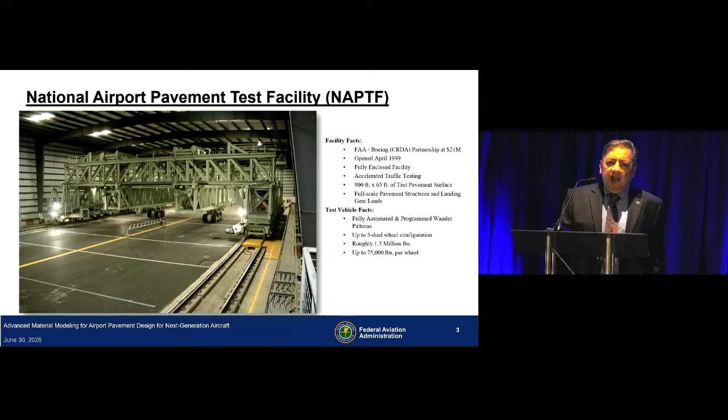In 1998, I joined Galaxy Scientific Corporation, a support contractor to the Federal Aviation Administration, and they were building a national airport pavement test facility at that time. My previous work was in low volume roads, so moving into airport pavements was very exciting for me.

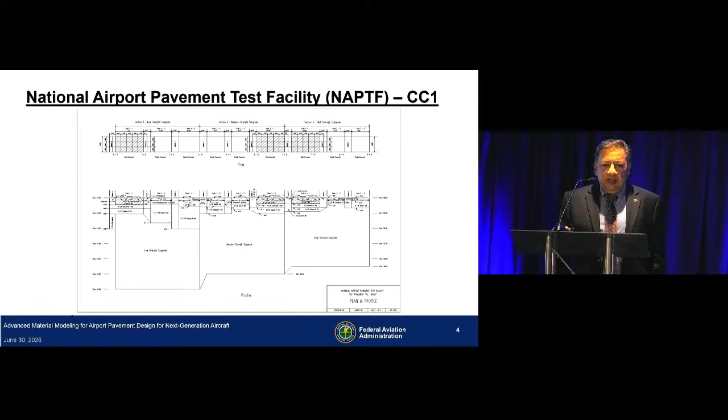This shows the layout of the facility. There were 3 different subgrade types: low strength, medium strength, and high strength. And there were 3 test sections built on each of these subgrade types: 1 concrete and 2 asphalt pavements, 1 with a stabilized base and 1 with a conventional aggregate base.

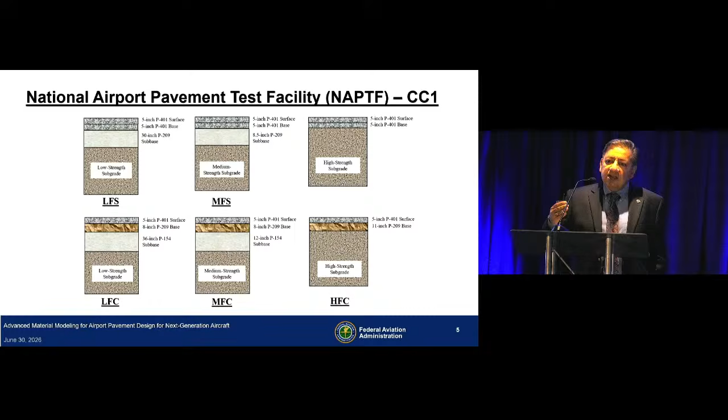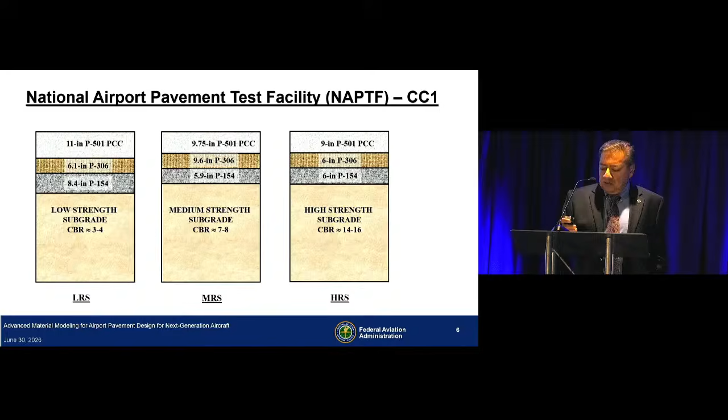This slide shows some of the cross sections. You'll see that the pavement cross section thicknesses are different. The reason is all the asphalt and concrete pavements were designed to fail in 10,000 passes of a Boeing 747 gear at a wheel load of 45,000 pounds. So the loading condition was the same for all, the subgrade conditions were different, and that resulted in different pavement thicknesses.

The test speed was 5 miles per hour, because for airport pavements the most damaging condition is when the aircraft moves from the gate towards the runway, so testing at slower speeds is more desired. The failure criteria for flexible pavements was 1 inch of upheaval outside the traffic area, signifying shear failure in the lower layers of the pavement structure, especially the subgrade.

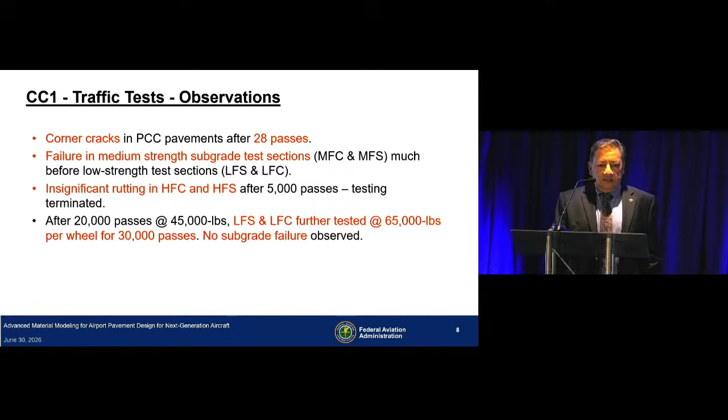So we started testing, and these pavements were designed for 10,000 passes. Concrete pavements had corner cracks in 28 passes. That was shocking. We stopped testing and had to do a lot of work on concrete pavements to figure out why that happened. Once we determined that, we continued testing on our asphalt pavements.

Now, again, they were all designed to fail at the same number of passes, but the medium strength subgrade sections failed much earlier than the low strength sections. That was very shocking for us too. And in the high-strength subgrade sections, we tested till 5,000 passes and did not see any significant amount of distress, which was rutting, so we stopped testing on those sections.

After 20,000 passes at 45,000 pound wheel load on the low-strength sections, we increased the wheel load to 65,000 pounds, a significant increase. We put additional 30,000 passes, and still those sections did not show any signs of subgrade failure.

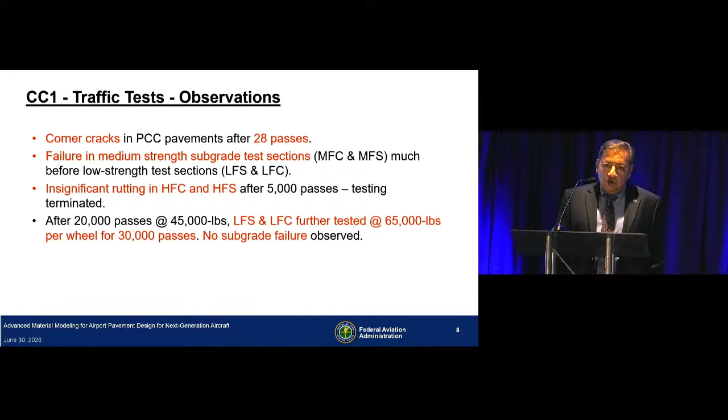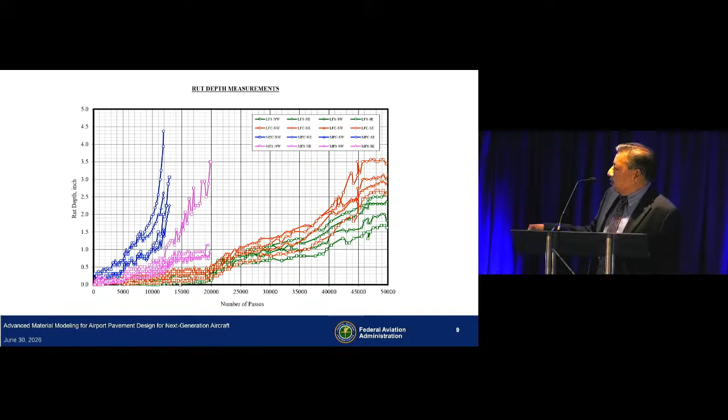On this figure, you can see the rutting results. These are the medium-strength sections that failed right around 10,000 passes. This is the medium-strength section with stabilized base, and these are the low-strength subgrade. Right here is where we increased the wheel load to 65,000 pounds.

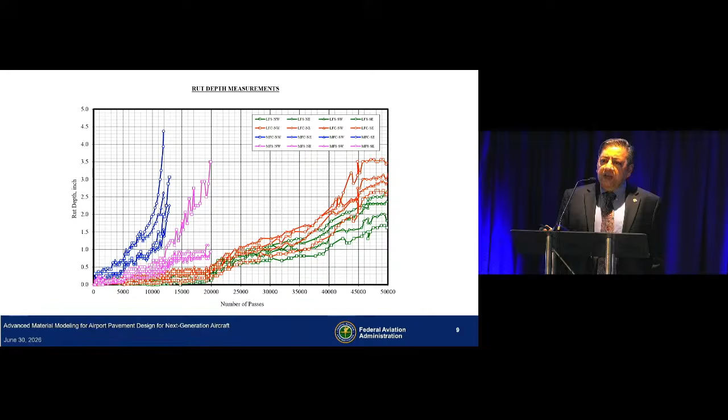So that brings up a question: what is there in our design procedure that we are not able to predict pavement life? We know predicting pavement life is difficult, but still, that's a huge difference. That prompted me to go into the history of airport pavement design, what's there, and how it evolved over time to reach where we currently are. So in the next segment of my presentation, I'll talk about the history of airport pavement design.

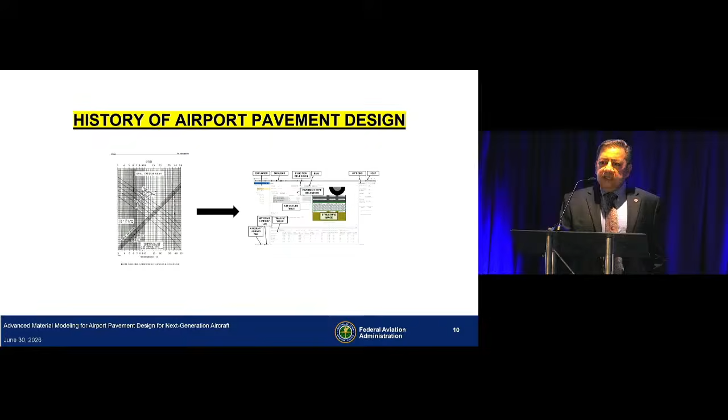Work on airport pavement started in the 1940s because of World War II, done by the US Army Corps of Engineers. In the 1940s they built some test sections. Before that, the performance curves available were for highway pavements, with design curves for up to 7,000 pounds as a function of CBR of the subgrade. So the US Army Corps of Engineers extrapolated these curves to 40,000 pound wheel loads.

But then there were these new bombers coming up, B-36 and B-29, that had wheel loads of around 100 to 200,000 pounds, a pretty significant heavy aircraft. You can see the size of the tires in this figure. So they built these test sections to extrapolate those design curves to 100 to 200,000 pounds.

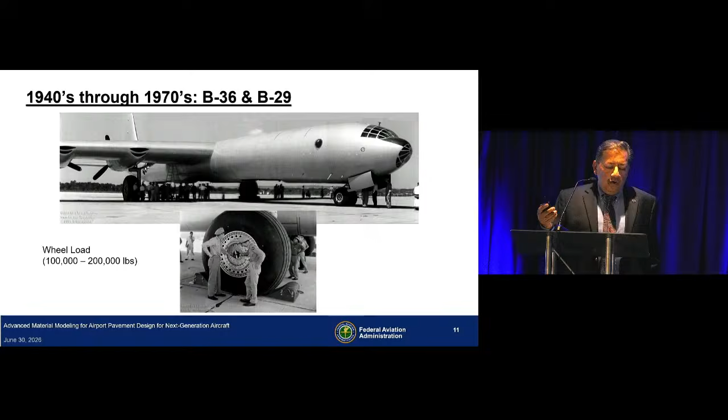It's very important to note that the person who wrote the report for the Stockton tests, Mr. O.J. Porter, made it a point in his report to say CBR is a good method now, but we should try to move away from that into other test procedures that quantify the bearing capacity of the soil and the strength of the soil. And stress ratio is something we should be looking at.

Over the years, US Army Corps of Engineers has done testing at different Air Force bases, but most of the testing has been done at Waterways Experiment Station in Vicksburg, Mississippi. Different load carts were developed over time to test for different aircraft, and you can see some of those load carts in this slide.

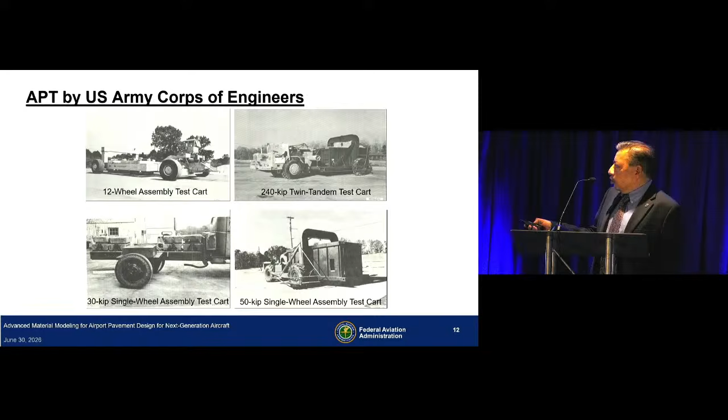From the 1940s to 1970s, all the testing was done by US Army Corps of Engineers, both over asphalt pavements, concrete pavements, and on overlays. The performance data generated from these full-scale tests formed the basis of airport pavement design procedures for both the Federal Aviation Agency, as it was known at that time, and the Tri-Services Manual.

One of the major test series carried out was also known as the multiple wheel heavy gear load study. It was the arrival of the Boeing 747 aircraft, with its four-wheel gears, that necessitated the need for this study. All the information from these studies was implemented in the form of nomographs.

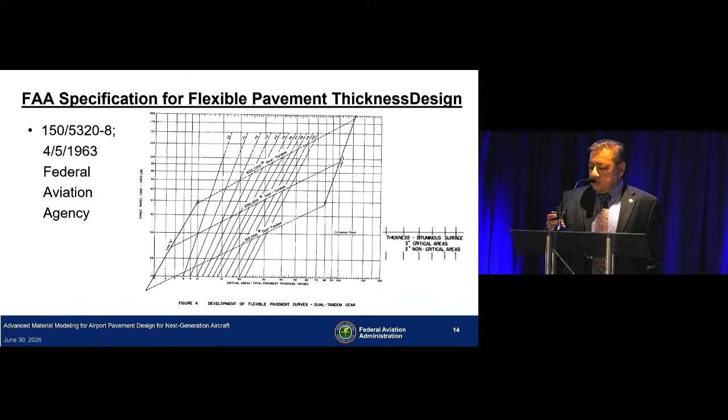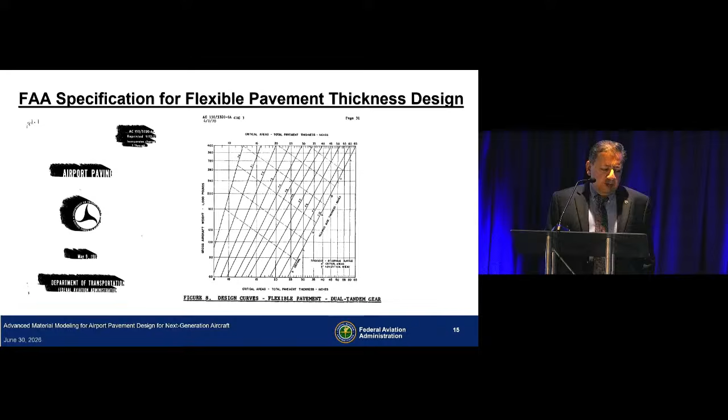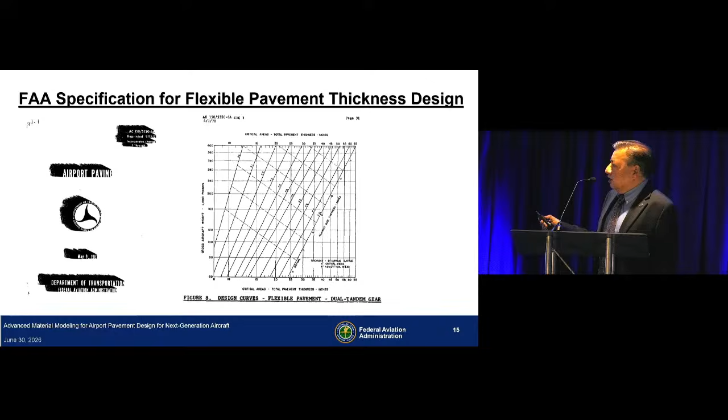As more data was accumulated, the charts were modified and new charts added for new aircraft as they came out. This particular advisory circular was issued on May 9th, 1967. Again, you have these nomographs for different landing gears and different aircraft, but still there is no consideration of aircraft operations.

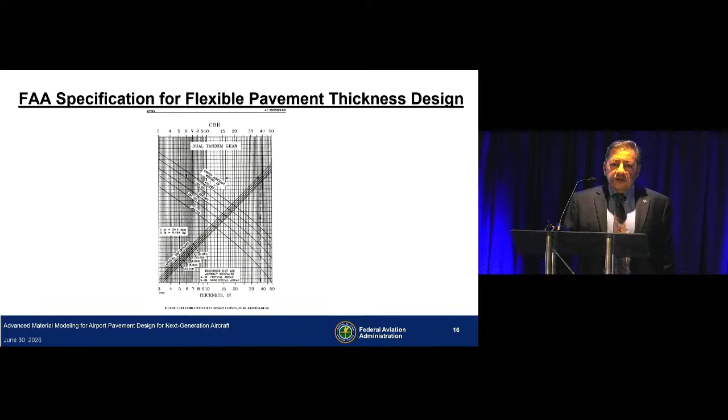In 1995 was issued Advisory Circular 5320-6D. This advisory circular's nomographs included CBR of the subgrade and aircraft operations, and the design procedure required you to convert departures of each aircraft into departures of a design aircraft. Once you have the departures and your design aircraft determined, you would go to the nomograph for that particular aircraft and come up with pavement thickness.

Then in the early 90s, there were two aircraft on the design boards, the Boeing 777 and the Airbus, at that time called the A3XX, which later became the A380. Now you're looking at wheel loads of over 60,000 pounds.

The ICAO methodology used at that time by different member states to look at aircraft-airport compatibility was called ACN-PCN, or Aircraft Classification Number and Pavement Classification Number. The way ACN-PCN methodology works is, if your ACN is less than or equal to PCN, you can have unlimited operations of that aircraft on that pavement. ACNs are the responsibility of the aircraft manufacturer, while PCNs have to be computed by the airport owners.

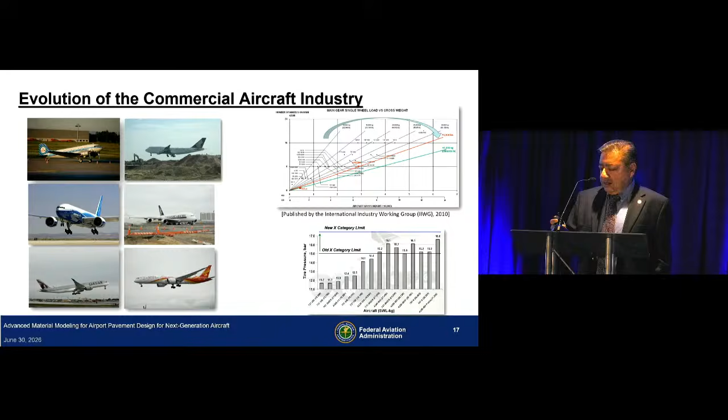So while testing was going on, researchers at FAA thought that with the 6-wheel landing gear, it was very important to consider wheel load interaction that takes place at lower depths in the pavement structure—in the base, subbase, and subgrade level. That's something that cannot be done using the CBR equation that was the basis of previous design procedures. That led to the development of LEDFAA, which stands for Layered Elastic Design for Federal Aviation Administration.

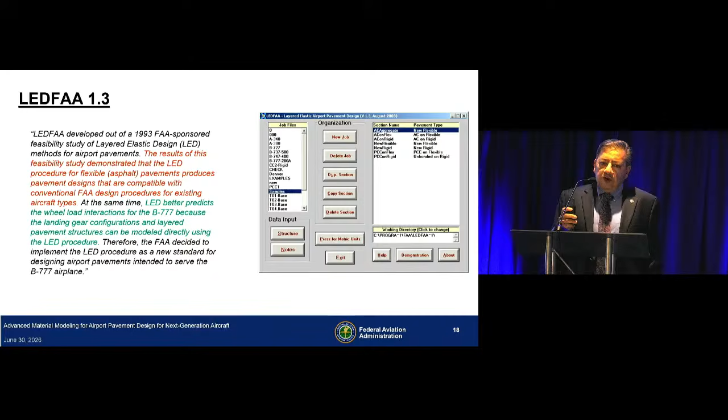They looked at pavement thickness designs using LEDFAA for the existing aircraft, and they were compatible with what thicknesses you would get from the nomographs. So FAA made a policy that if any aircraft traffic mix has a six-wheel landing gear aircraft, which was the Boeing 777 at that time, designers were supposed to use LEDFAA for pavement thickness design. If your aircraft traffic mix did not have the 777, you could use the old nomographs.

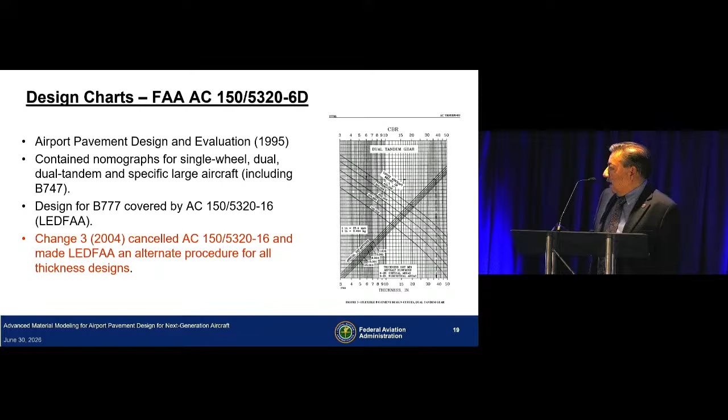When we started using LEDFAA and were refining our failure models based on the full-scale test data we were generating at NAPTF, we found that LEDFAA should be fine for any kind of traffic mix. So in 2004, FAA issued Change 3, which cancelled Advisory Circular 5320-16—this was the advisory circular that required use of LEDFAA. LEDFAA was made an alternate procedure for all thickness designs, whether your aircraft traffic mix has the Boeing 777 or not.

You characterize your materials—what materials are you using for construction of your airport pavement? Climate—how is it going to affect your pavement performance? And traffic. Remember, in the previous design procedures, we were looking at a design aircraft—that was the traffic model for those design procedures—but we had new ideas for the mechanistic empirical design procedure.

So all these inputs are then fed into a structural model. In LEDFAA, it was a layered elastic analysis. The structural model would predict critical pavement responses such as stresses, strains, and deflections, which are then related to pavement performance through the use of transfer functions.

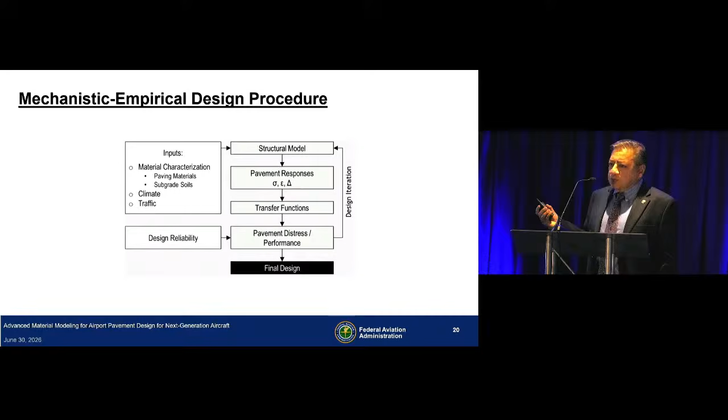This part here, the transfer functions, is the empirical part, because this is based on observations under full-scale tests or at actual airports. That's probably one of the reasons why it'll be very difficult to have an entirely mechanistic design procedure.

So while LEDFAA was being used, we were also working on developing a finite element-based design procedure, and that was FAARFIELD. FAARFIELD 1.3 was released in 2009, and the advisory circular issued by FAA at that time was 5320-6E, which required you to use FAARFIELD.

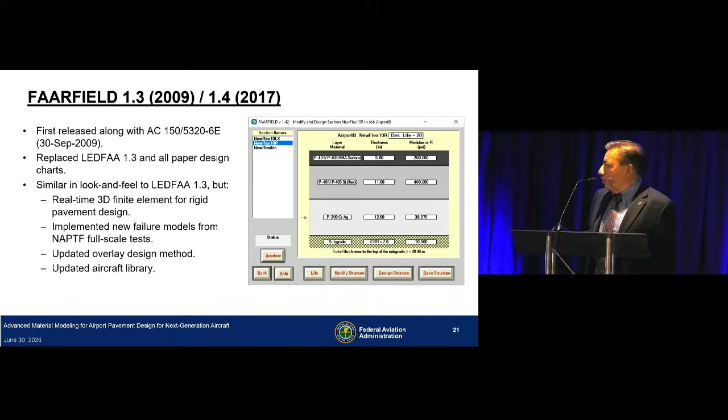It replaced all the nomographs and LEDFAA. Now, if you look at the user interface, if a person had used LEDFAA, using FAARFIELD was exactly the same, because all the improvements and advancements were in the background. FAARFIELD had layered elastic analysis for flexible pavement design and used 3D finite element for concrete pavement design.

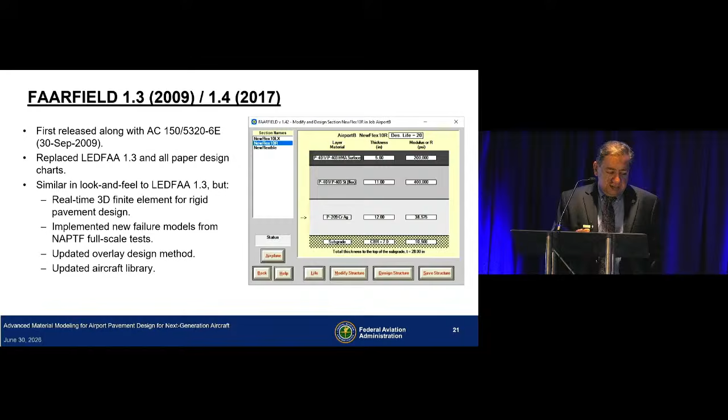When you look at the structural response models, for rigid pavements we were using the Westergaard solution for the nomographs. For flexible pavements, we used equivalent single wheel load that was computed using the Boussinesq model, whereas in FAARFIELD we used layered elastic analysis for flexible pavements and 3D finite element for rigid pavements.

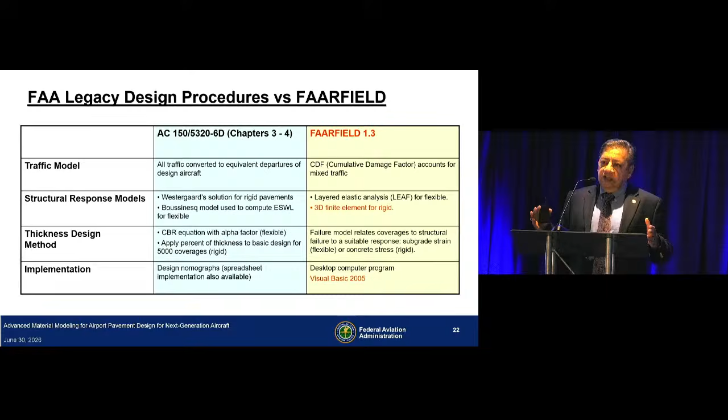For the thickness design method for flexible pavements, it was the CBR equation in the nomographs, and in FAARFIELD we used failure models developed based on full-scale test data—we looked at the entire history of full-scale testing from the 1940s till mid-2000 to develop those failure models. Implementation of the old method was in the form of nomographs, whereas with FAARFIELD it's in the form of a computer program.

The latest version of FAARFIELD that you can use currently is FAARFIELD 2.0. Here is a screenshot of FAARFIELD 2.0—it has a much more modern look to it. The failure models are still the same compared to FAARFIELD.

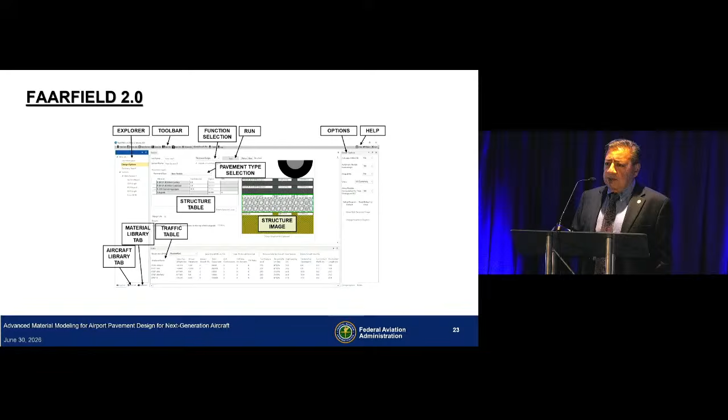For flexible pavement design, the two predictors of pavement life are the horizontal strain at the bottom of asphalt layer, which relates to fatigue failure in the asphalt material, and maximum vertical strain on top of the subgrade, which relates to rutting in the subgrade that ultimately causes shear failure.

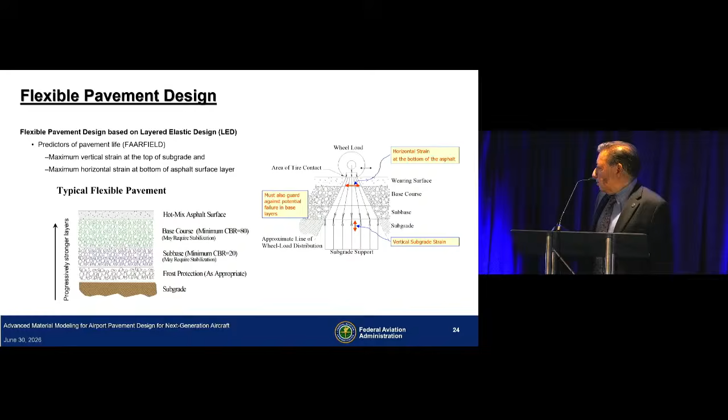So how do we account for traffic in the new design procedure FAARFIELD, or what we currently have, the state of the art?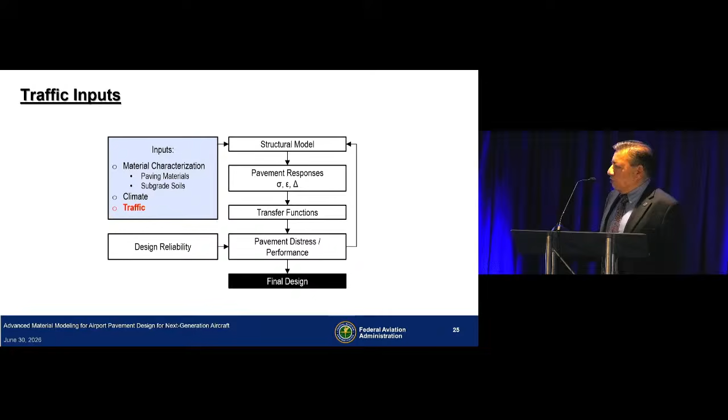We look at the cumulative damage factor, which is the summation of damage caused by individual aircraft, then sum it up. When your CDF value reaches 1, that means you have utilized the entire life of that pavement structure. So in FAARFIELD, the gear location and wander are considered separately for each aircraft in the traffic mix.

Pilots try to put the nose wheel gear on the center line of the runway, but you still see some wander, and that wander depends on what type of aircraft you're in. So that's considered, and the CDF is calculated for each 10-inch wide strip over a total 20.8 meter width.

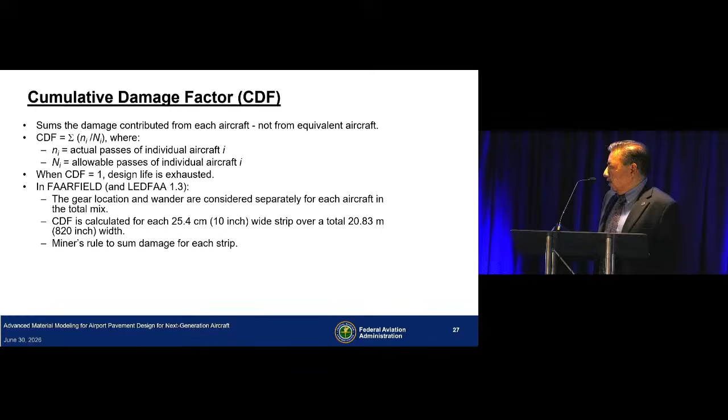We look at where the critical location is, and the CDF coming from each aircraft at that location is summed up to design your pavement. We use Miner's hypothesis to sum up the damage.

This figure explains that part. We are showing two different aircraft, airplane A and airplane B. The difference between their peak responses is because of difference in the gear location.

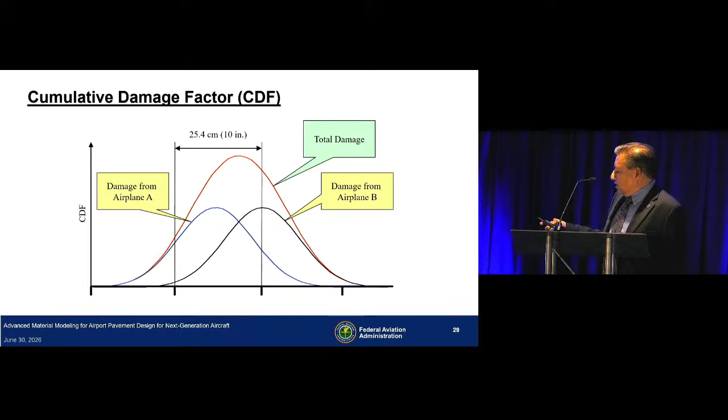When you sum up the damage from each aircraft at each location, what you get is the red curve, which is the total damage caused by these two aircraft. And that is what is used in the thickness design.

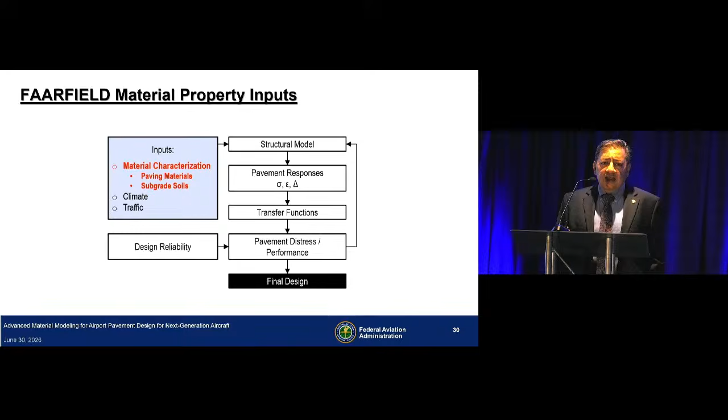For climate, the design procedure does not consider climate explicitly, but we have Advisory Circular 5370-10H that provides material and construction specifications, giving guidance on how to select different binder grades depending on which temperature region you are in the country.

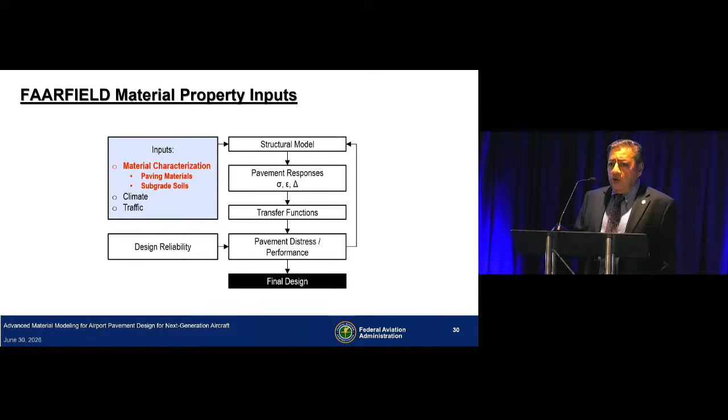Next, I'm going to talk about material characterization, how it is done today. This chart summarizes the material properties that are used in airport pavement design procedure FAARFIELD.

For aggregate and subbase, the modulus is computed by a routine embedded in FAARFIELD that looks at internal sublayering and then assigns modulus values, with modulus increasing from bottom to top, which accounts for confinement, since confinement reduces as you go down in the pavement structure.

For subgrade soils, users can input elastic modulus, but most of the time CBR is the value that is available, and CBR is converted into modulus by multiplying it by 1500.

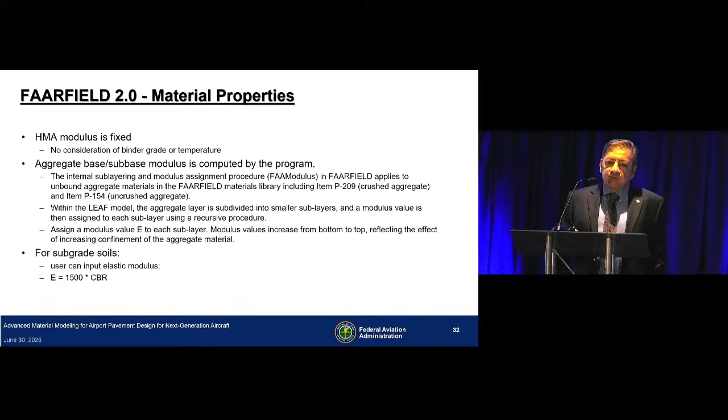That also raises some issues, because if you look at the relationship between modulus and CBR in literature, there is a wide variation in those modulus values. So which relationship do you really use? The one FAA uses comes from the Shell design procedure, 1500 times CBR.

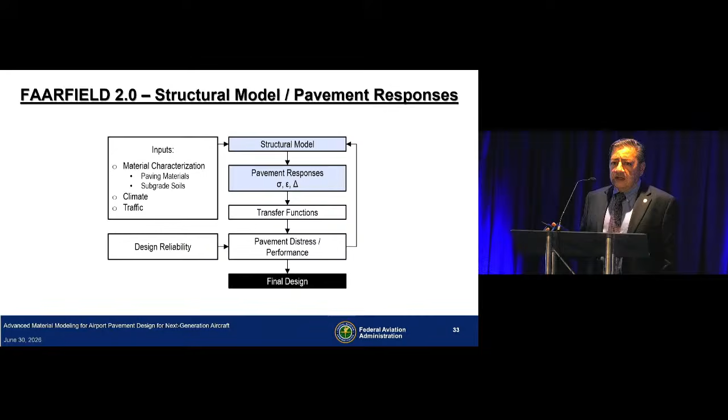For the structural model, as we already discussed, it's layered elastic analysis for flexible and 3D finite element for rigid pavements. The pavement responses we look at are strains in the asphalt concrete and vertical strains on top of the subgrade.

The number of cycles to failure in fatigue is a function of the plateau value, and the plateau value is a function of strain in the asphalt, the flexural stiffness, the void parameter, and gradation parameter. This model was developed based on 4-point bending beam fatigue tests.

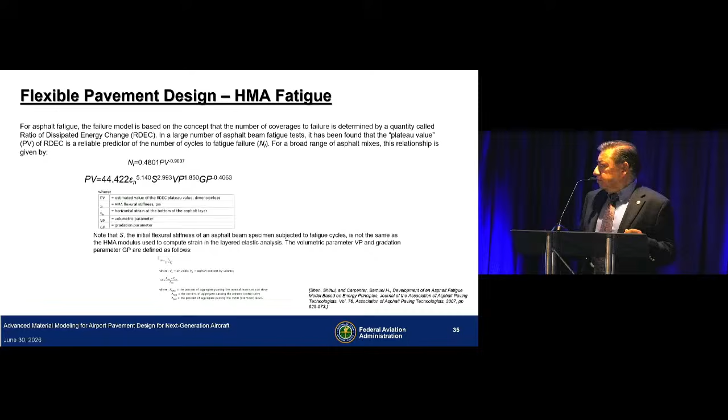This design procedure measures the flexural stiffness of the beam for the first 100 repetitions, and failure is considered when the stiffness reaches 50% of the initial value, signifying formation of microcracks in the asphalt beam. The volumetric parameter and gradation parameter come from your mix components, so if you know your asphalt mix, you can compute the gradation and volumetric parameters and determine your number of cycles to failure.

We did tests in construction cycle 7 to validate and refine the model, and found that the number of cycles to cause alligator cracking—since in the field, fatigue is defined by the occurrence of alligator cracking—takes about 3 times the number of cycles predicted by this model. This makes sense because failure in the model is reduction in stiffness to 50%, which represents microcracks, whereas alligator cracking involves almost full-depth cracks in the asphalt layer.

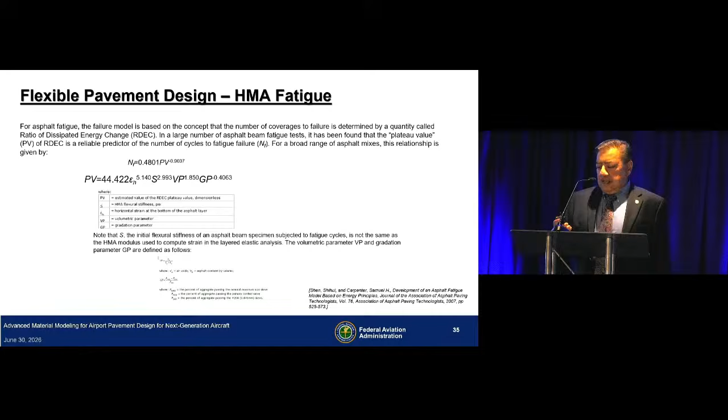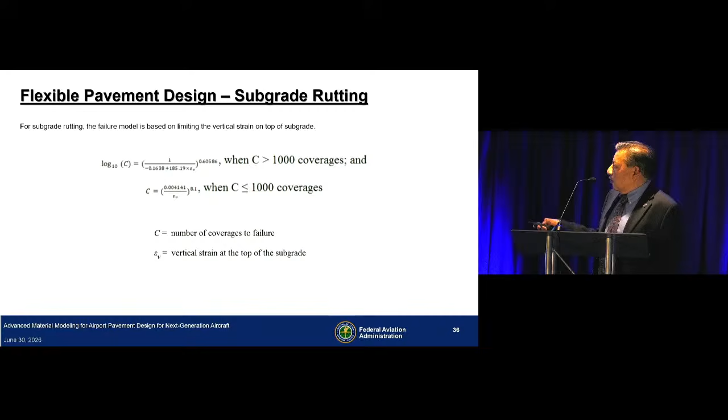For subgrade, it's a kind of bilinear model. We have one equation when the coverages are less than or equal to 1,000, and another equation when coverages are greater than 1,000.

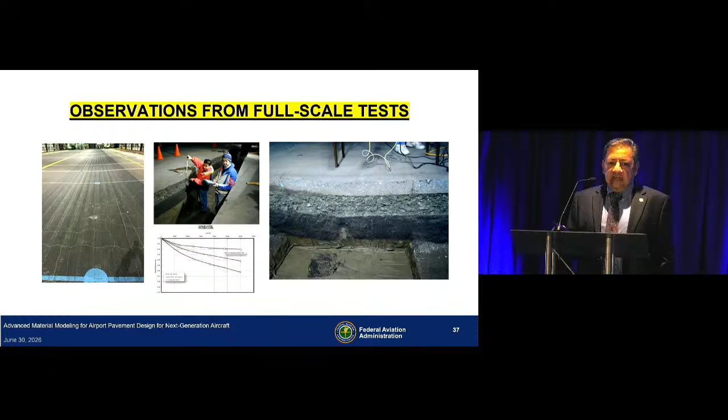So that's the current state of the art of our pavement design procedure: the responses we use for predicting pavement life, and the material input properties. But what was the reason for such a big difference in pavement life that was observed, even though the sections were designed to fail in 10,000 passes? The next section will cover what we observed in the full-scale tests from 2000 till now, which may help explain the difference between predicted life and actual life.

We'll start from the top layer of the pavement, the asphalt material. If you remember, in design, asphalt modulus is fixed with no consideration given to binder grade or temperature effects. This was research done at the National Airport Pavement and Materials Research Center, where we have the ability to control pavement temperature and test sections under controlled temperatures.

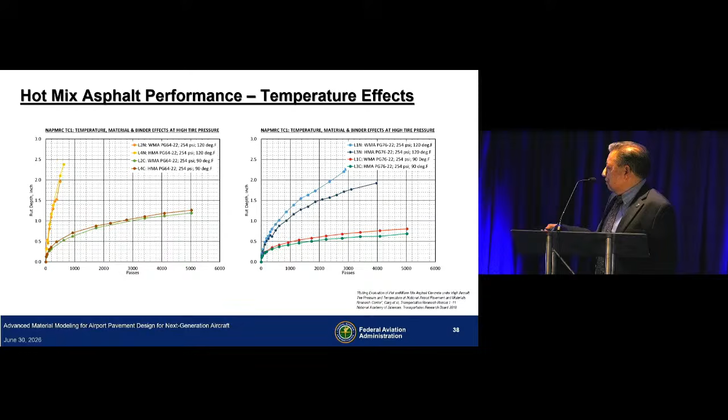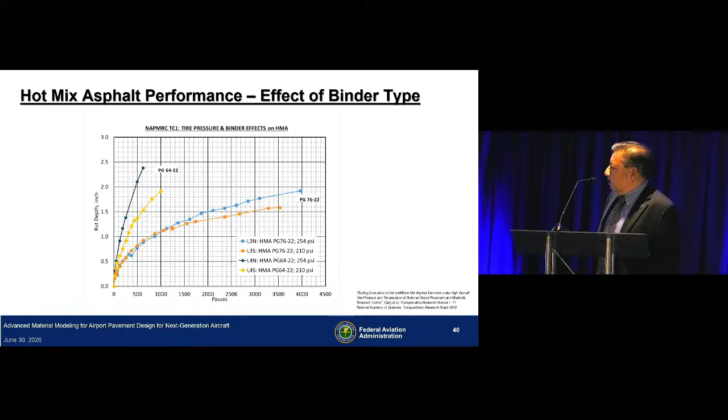Cracking, fatigue cracking. Now, one of the advantages of full-scale testing, accelerated pavement testing, is you can see the evolution of distress in these pavement structures. And when you look at cracking,

So you do not have any significant amount of unrecovered or permanent strain. When you look at the transverse strain gauges, that's where you start seeing some strain accumulation, for both single axle and 3 axles. As each of these axles approaches, you start seeing accumulation of strains. And it is this accumulation of transverse strain that results in the longitudinal crack in your pavement structure.

So the first crack that you generally see is a longitudinal crack, and these cracks form right around tire edges. Why they form right around tire edges is something that will come later in my presentation, where I'm going to use some of the work from Professor Al-Qadi's research. Once these longitudinal cracks extend, they kind of become like asphalt beams, and then they start developing transverse cracks, and that's what results in your alligator cracking.

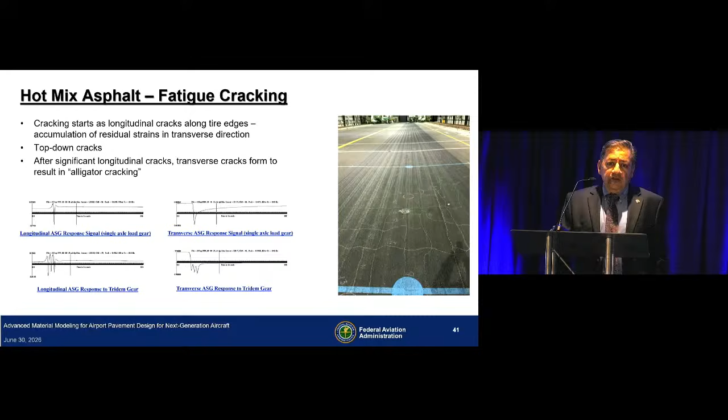Whenever a crack is formed, you want to know whether it's surface initiated or coming from the bottom, because most design procedures assume bottom-up cracking in the asphalt. In my 28 years at this facility, I have never seen a bottom-up crack. All the cracks have been top-down. I remember a presentation given by Professor André Molenaar from Delft University at one of the ISAP conferences, titled Bottom-Up Cracking, a Myth. I'm one of those people who has never seen it. We've even built thinner sections with 3-inch thick asphalt pavements, and still it's been top-down.

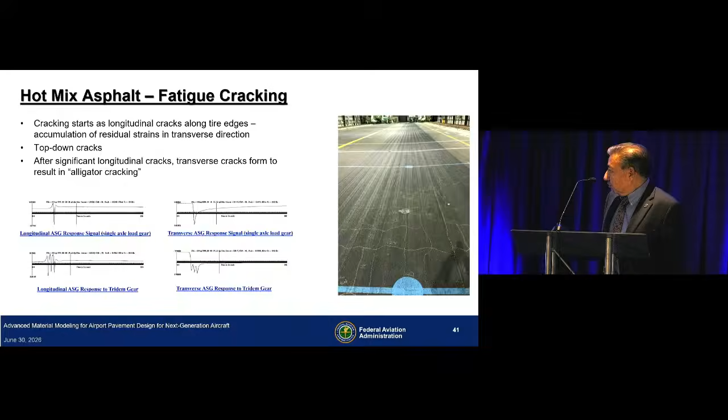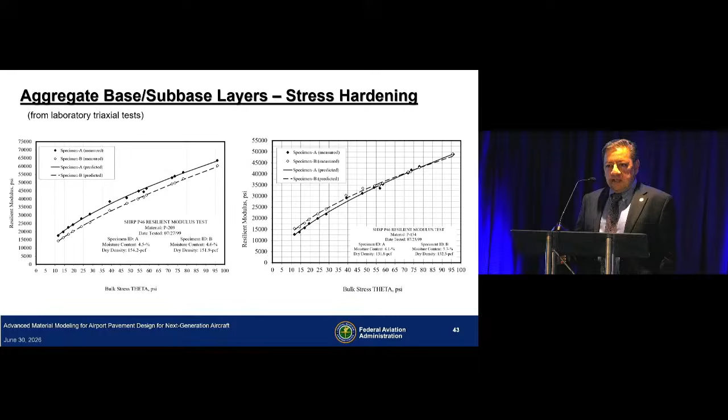On the right side is the chart for our sub-base material, P154. In our studies, we used crushed screenings, so it's a crushed material, and it also shows stress hardening behavior. Whereas, if you remember in our design procedure, we use an equation to compute the modulus of the aggregate layer as a function of subgrade CBR and layer thickness, without giving any advantage to the quality of the material we are using.

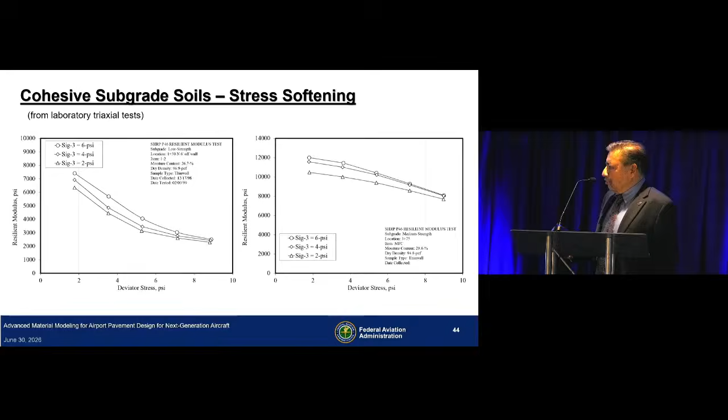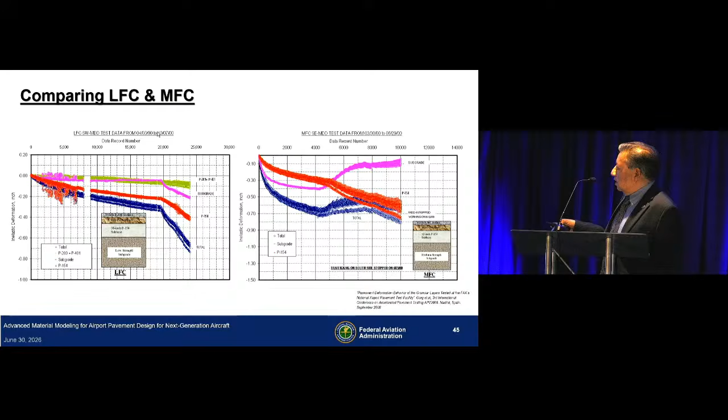It's a very different behavior in your medium strength subgrade test section. Your deformation in the subgrade is much higher compared to your base or subbase layer. This is your subbase layer, and something happens around 5,000 passes—as you can see, we see the change in the curve.

Why these curves turn upwards is that the MDD was not located at the location of maximum rutting. It was not in the center, it was on the side. So this material flow was pushing the tube of the MDD, and we saw that in the trenches.

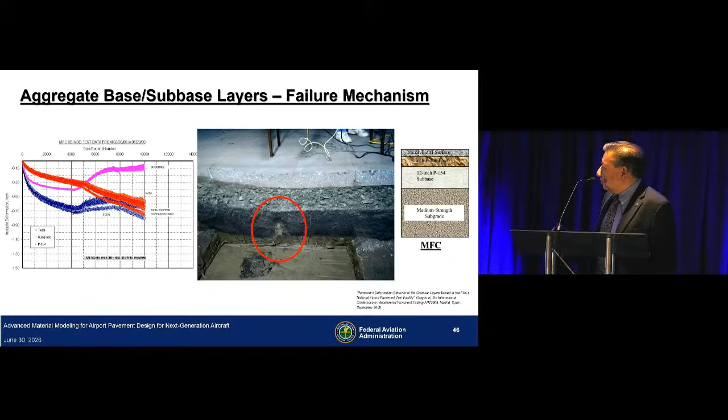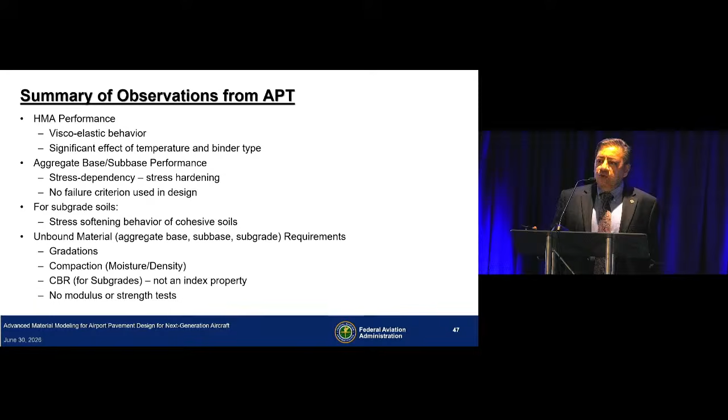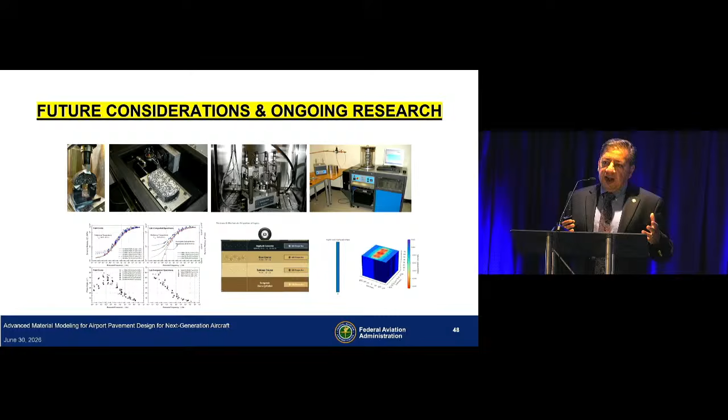So we saw how pavements behaved, and we saw our design procedure. So where do we go from here so that we can bridge the gap between the predicted life and the actual life of the pavement structure? That's something I'm going to talk about in this part of my presentation.

You can do advanced material characterization. There are a lot of lab tests available that characterize the viscoelastic, viscoplastic behavior of asphalt materials, the stress-dependent behavior of aggregate layers, and stress-softening behavior of subgrade soils. But you also need a pavement analysis tool that can use these input properties, and that's something we are currently doing.

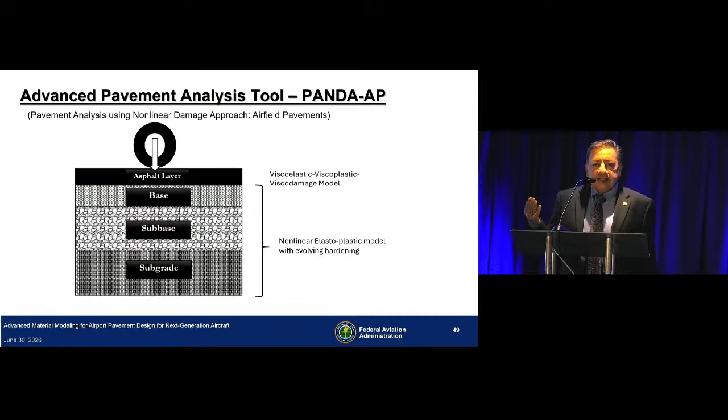We are working on developing this program called PANDA AP, which is pavement analysis using nonlinear damage approach for airfield pavements, where the asphalt layer is modeled as viscoelastic, viscoplastic, and the aggregate materials and subgrade are modeled as nonlinear elastoplastic materials with evolving hardening.

For asphalt materials, we use a combination of Schapery's model to look at nonlinear viscoelastic behavior, and a Perzyna-type viscoplastic model to look at hardening and relaxation to account for permanent deformation in the asphalt material.

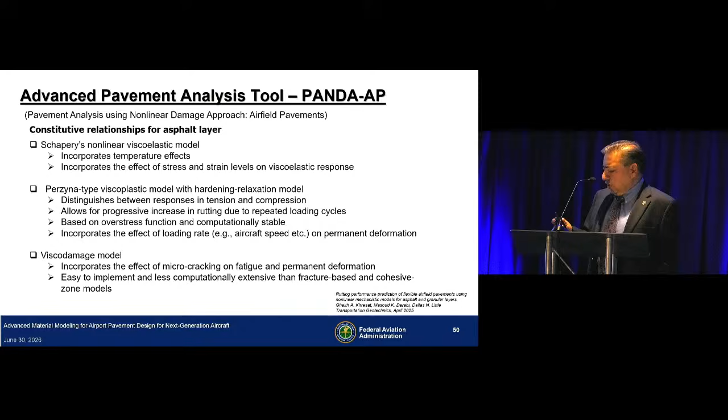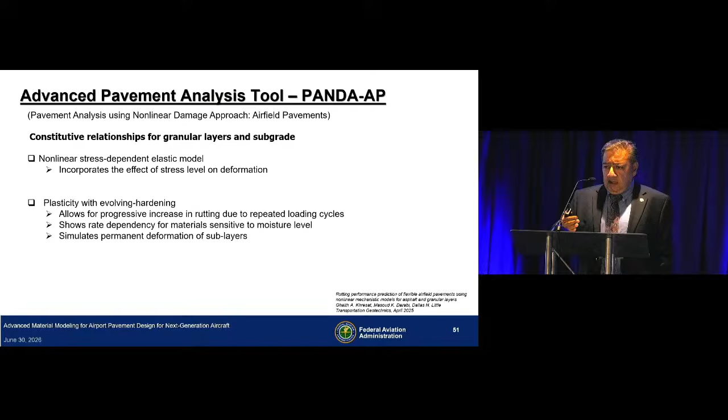Currently, this program is going through critical evaluation, and we have around 20 subject matter experts in the US and abroad working with the program to provide us comments. Because one of the things we also want is that the program should be easy to use, because if it's not easy to use, people are not going to use it. So we are looking at the usability and the science behind the models.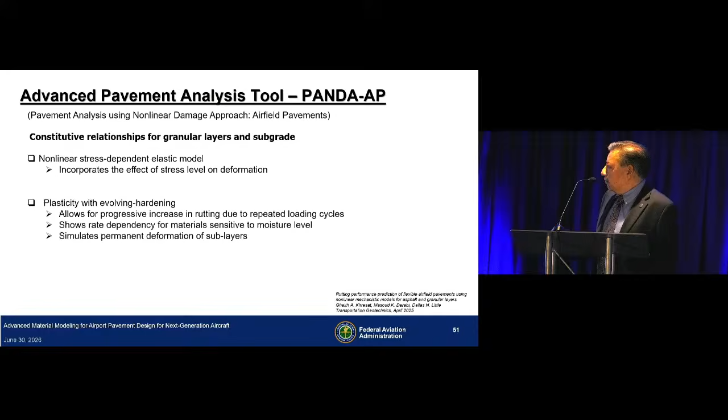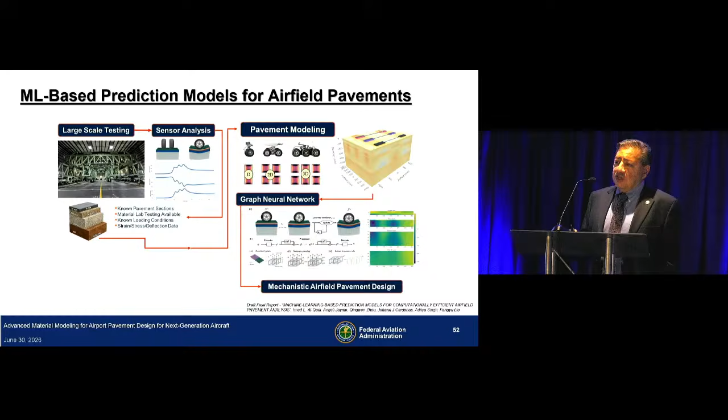We are looking at machine learning-based prediction models for airfield pavements. We have been collecting sensor data for the last 30 years, so we think we have a significant amount of data that we can use to start looking at new technologies that are available, artificial intelligence and machine learning. We are working with the University of Illinois, and Professor Al-Qadi is the PI on this project. We looked at all the sensor responses and looked at performance models. The final reports are currently under editing process, so they should be out pretty soon for you to download.

In fact, FAA developed a new pavement evaluation process that replaces ACN, PCN. It's called ACR, PCR, Aircraft Classification Rating and Pavement Classification Rating. In the previous ACN, PCN methodology, there was an overload criteria for how many overload operations you could put on a pavement, but those numbers were picked up from thin air. There was no science behind it.

So we have been doing research to develop an overload criteria for the ACR, PCR methodology, and my colleague, Dr. Dan Offenbacher here, has been analyzing the data to come up with the criteria. Subgrade stress ratio is what they found that best relates to provide guidance on overload. I think this is something we'll be looking at in the future to look at failure in the subgrade layers and also in the aggregate materials.

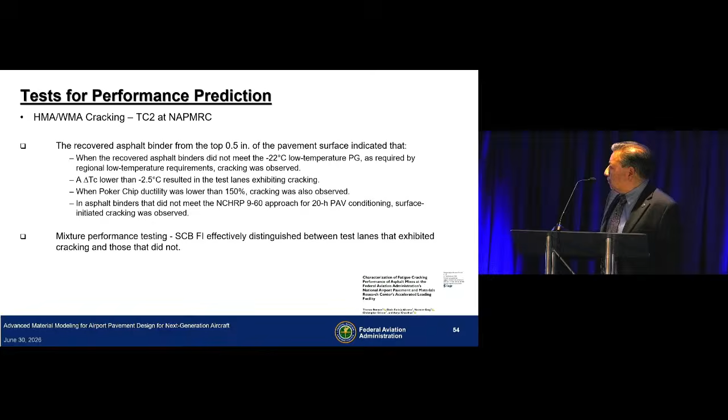Around 2006, 2007, we worked with the manufacturer of the asphalt pavement analyzer to develop APA equipment where we could apply 250 PSI. Because if you look at FAA 5370-10 advisory circular, we moved from Marshall mix design to SuperPave, but there was no performance criteria listed. So we developed this APA, and Dr. John Rushing from ERDC visited our facility and did significant testing on his mixes as part of his PhD dissertation. We developed a criteria that if a mix experiences less than 10 millimeters of rutting at 4000 passes at 64 degrees, it is good enough to go on an airport and should not suffer significant rutting issues.

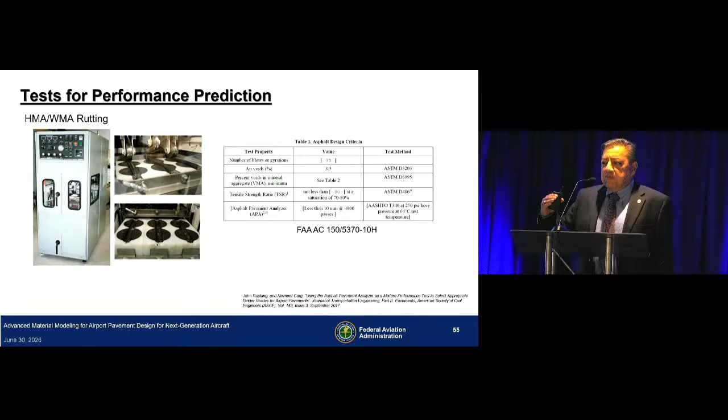And the rutting project under balanced mix design also showed that APA was the best performing test that ranked the materials according to their performance. So what they're doing is modifying this criteria for different temperatures and for different wheel loads.

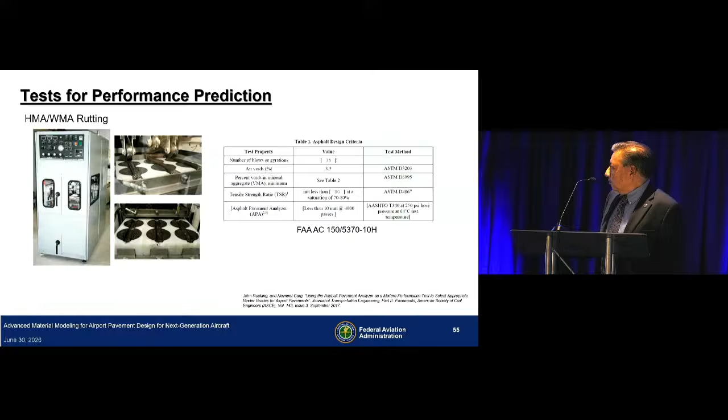So you can have advanced material characterization, advanced models that you use, but the most important factor that actually gets the least interest is construction. If you don't build your pavement right, no matter how good your pavement was designed, it is not going to perform.

So we have to come up with ways of characterizing our construction and the materials that are going in for acceptance. So we started this project for developing a specification for use of non-nuclear technology in measuring properties of unbound pavement materials for both soils and aggregates, and developing a specification that could go into our advisory circular.

And the equipment that we primarily looked at is the lightweight deflectometer, which is much easier. You can carry it, you can do a lot more tests compared to a CBR, and it gives you a modulus value that you can use in your design. And by changing the drop height, you can also capture the stress softening or stress hardening behavior of these materials in the field.

And we worked with University of Texas at El Paso, and Dr. Soheil Nazarian was the principal investigator on this particular project. There is a report, which has not been published yet, but the results of the study are published in a paper that you can access. The paper was published in the International Conference on Transportation Geotechnics.

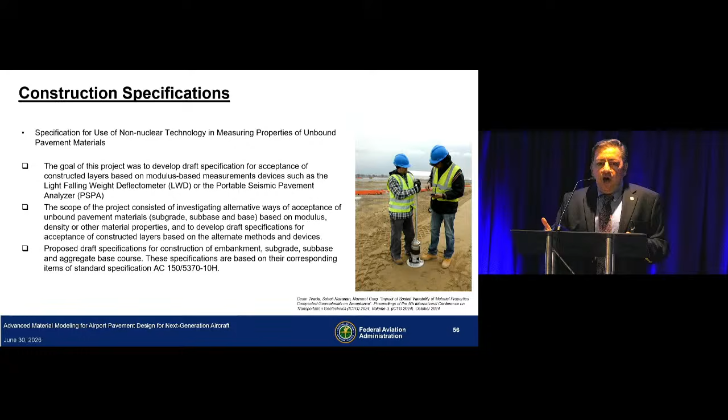Another thing to look at is the non-uniform contact pressure distribution under the tire. This slide I took from Professor Al-Qadi. One of the things you see here is they found that at the edge ribs, the peak pressure is about 2.2 times the tire inflation pressure, and in the center ribs it's about 10% higher than the inflation pressure. To me, this could be the reason why we see longitudinal cracks develop right along the tire edges, and this is something that happens every single time.

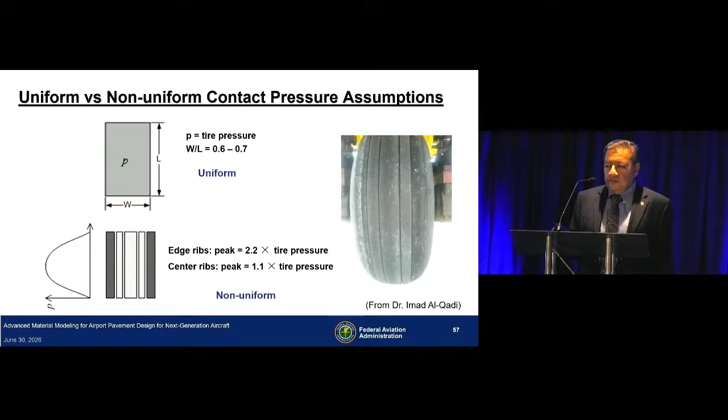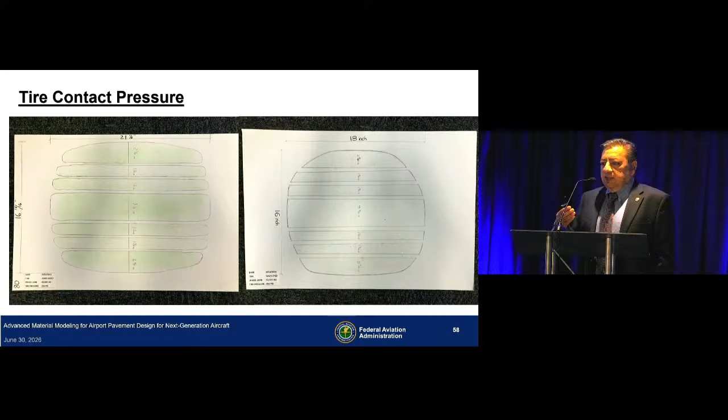After I saw this work, we started taking tire imprints under different tire pressures and wheel loads. Just by doing simple math, assuming uniform pressure distribution in all these ribs and taking out the unloaded area from these, the contact pressure is almost 16 to 20% higher than your tire inflation pressure. So to me, that's an important factor that we should be considering in our design procedure.

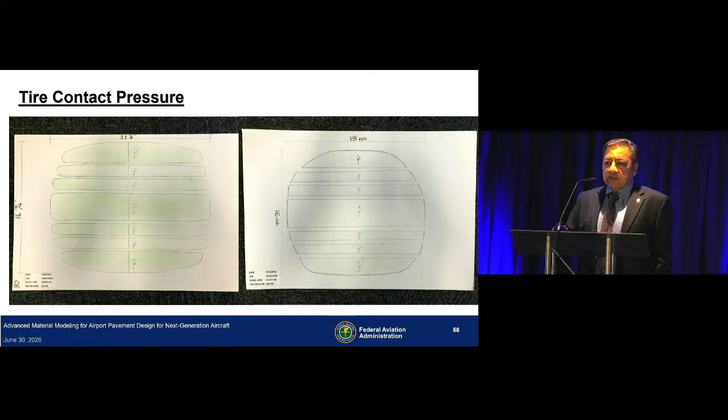And the plan is to develop something that can be incorporated into PANDA.

We are looking at other kinds of instrumentation, like one of the distresses we see on airports once the tire pressure of the aircraft went high up was delamination in the asphalt layers at high-speed exits. So our French counterpart, DGAC, and their research group called STAC...

Currently, we are evaluating the performance of cold central plant recycling materials. We completed construction of these sections last year in November as part of a NAPMRC project. These are just some photographs showing milling of the asphalt and then putting them in the plant to come up with CCPR material to be placed back.

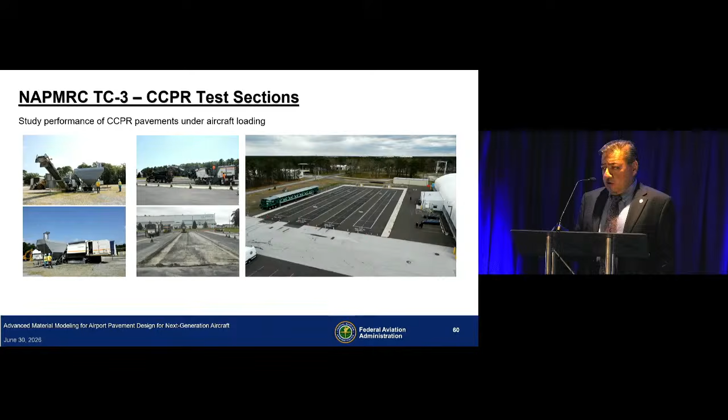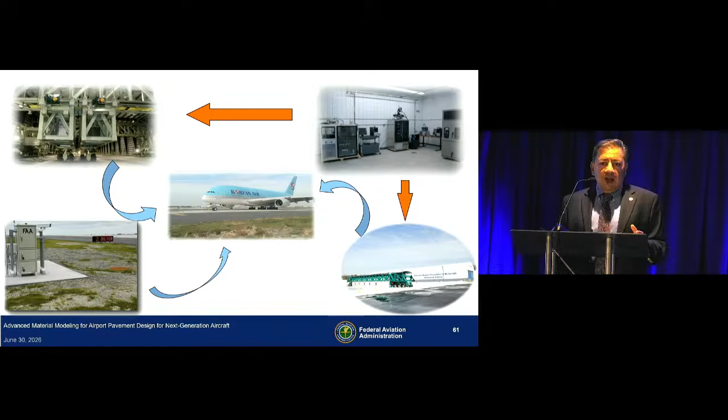So the whole idea of our research is to generate performance data from full-scale tests, from instrumented airport sites, and from our lab, develop performance models for different materials, and combine all this information to come up with airport pavement design procedures that can design pavements to handle aircraft traffic of today and tomorrow in a safe and efficient way.

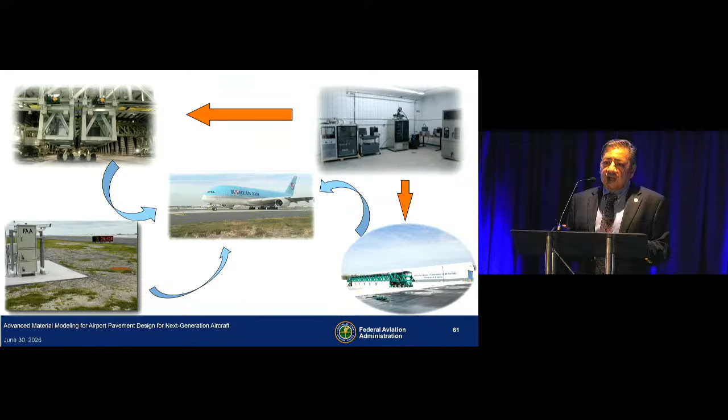None of this work would have been possible without the support of a number of people. So I would like to acknowledge my management. I work for Airport Technology R&D branch, and our sponsor is the FAA Office of Airport Safety and Standards. I thank them for their trust in me for all the research projects that I proposed, and they let me do that and come up with the findings that you saw today.

All the support contractors over my 28 years career there. I started myself working for Galaxy Scientific. I worked for 9 years before I became a federal employee, and worked with some brilliant individuals from these companies, some of them with whom I'm still working with, and it's been an honor and privilege to work with them.

Our federal organizations, ERDC, we have done a lot of joint projects together. I know we have a big team from ERDC, and we have worked with almost each one of those individuals. Currently, they are actually evaluating our PANDA program. Federal Highway Administration, different airports and airport authorities, because without their support, we would not be able to go and instrument pavements. Even though we have two test facilities where we can change temperature and stuff, we are still testing under controlled conditions.